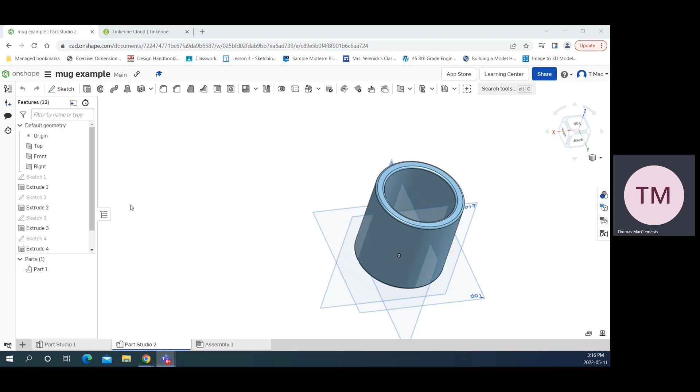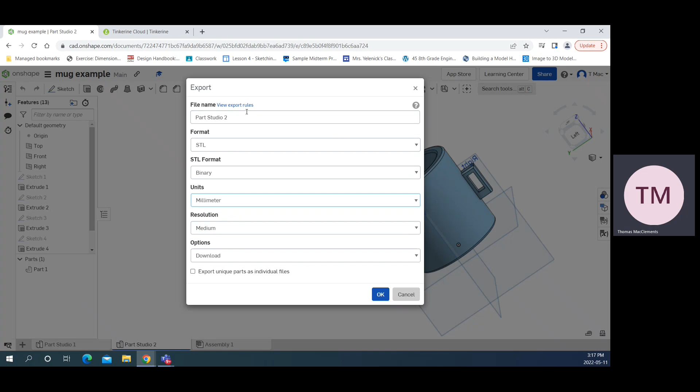I'm already in Onshape here with my fancy mug. You're going to right-click on the part studio that has the part you want, click on Export, choose STL file, change it to millimeters, and give it a file name, mug.

Okay, so I've downloaded it. Now I'm going to go to Tinkerine Cloud, sign in, and import the mug file. It is successfully uploaded, so it's right here, double click, and I have it open.

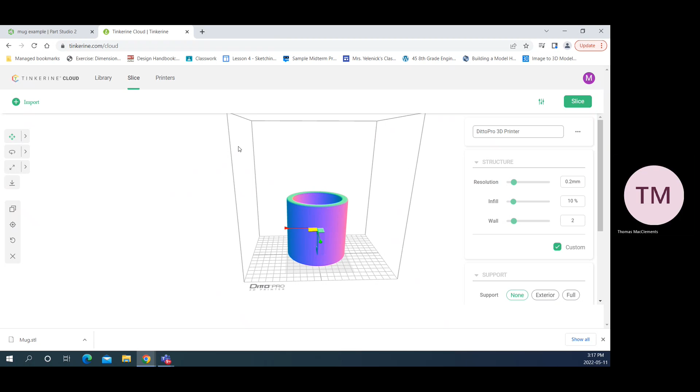To move around, you right click to move around and left click to rotate your view. On the left-hand side, we have translate, or moving the object, so I can move it left or right.

I can rotate it. For example, if I wanted to rotate it 90 degrees, I can rotate it 90 degrees. If I want to undo it, just Control Z.

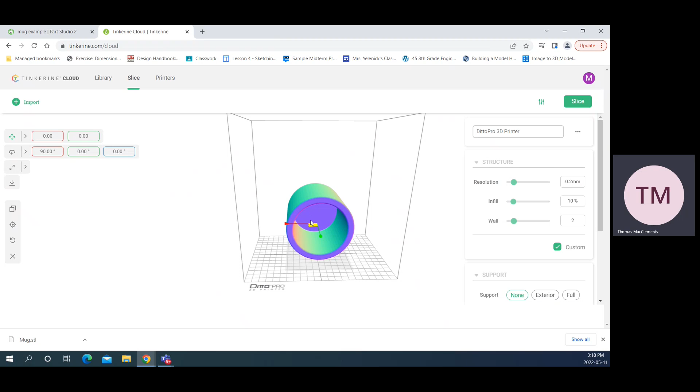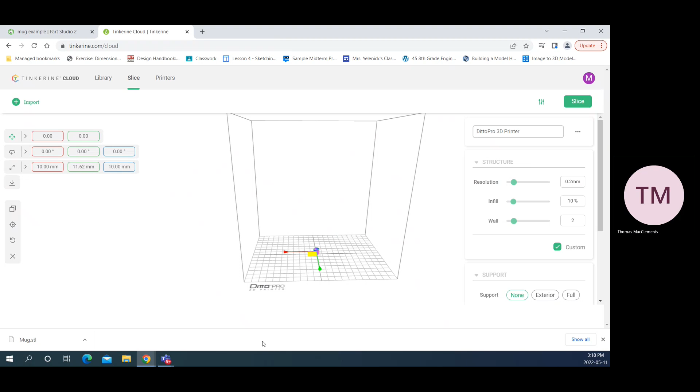Then I have scaling here. It's going to automatically keep the ratio, which is almost always what you want to do. In this case, I'm going to change it to be 1 centimeter, and it changed the scale. I'm scrolling in using the scroll button on the mouse.

This button right here, make sure that it's on the platform. Once we have it on the platform, we could add other models if we wanted to, if I wanted to have more of the same. We can undo that.

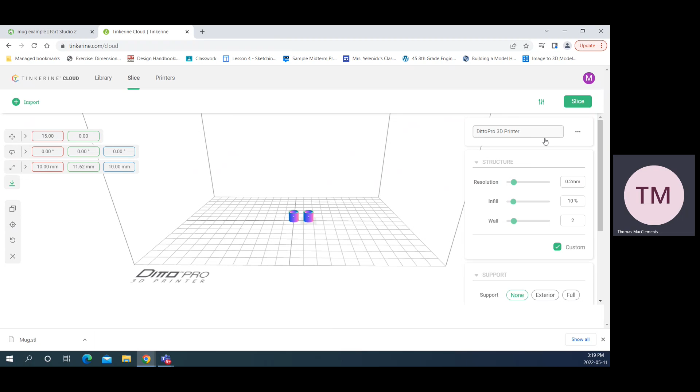Now I'll show you how to set up the settings for the slicing. Our printer is this one here, the DittoPro 3D printer. Normally it looks like this, sorry. You're going to click on medium, infill is sparse, click on custom.

The resolution, this is medium, so 0.2 millimeters per layer. The infill you're actually going to change to 10%. It's going to use a lot less plastic, and it'll still be plenty strong. The wall is the outside layers, so anything facing the outside world will be 2 layers thick.

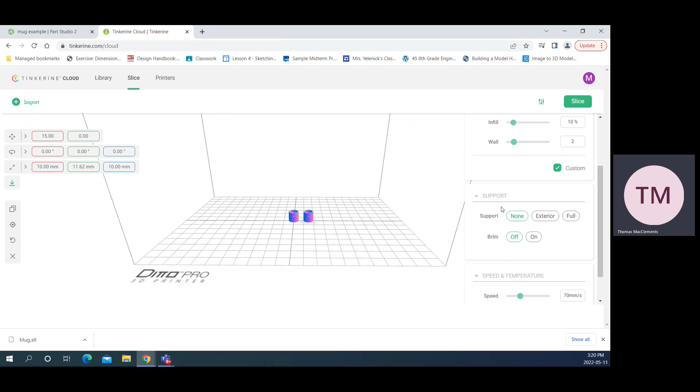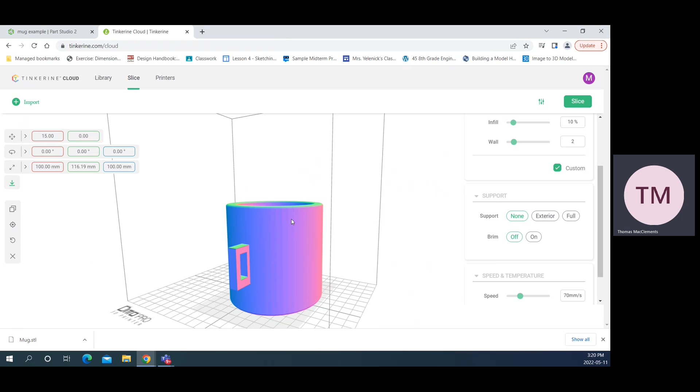Sometimes you might need support. I'm going to change the scale back to 100 so we can see a little bit more. My other model that was there is still there, it's just been eaten by this one, so I can see it right there. If I want to put a brim on, the brim just helps with adhesion to the printing platform. So let's press slice and have a look what happens.

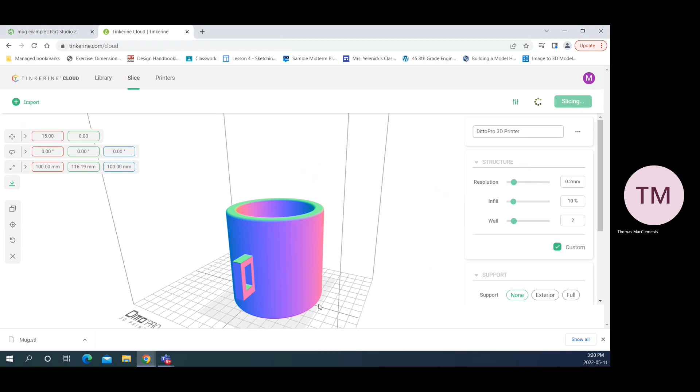Good. So right at the bottom here, you can see how there's a couple layers right here that are outside of the full mug, and that's the brim.

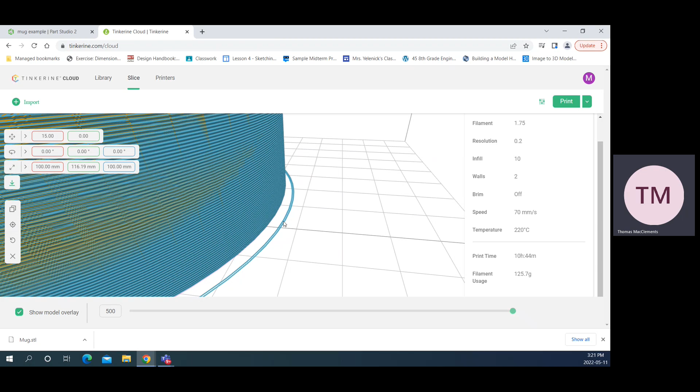So if I took the brim off and did the same thing, see, there's no layers in between right here. This outside layer right here is just to have it laid out so that you don't hit other models.

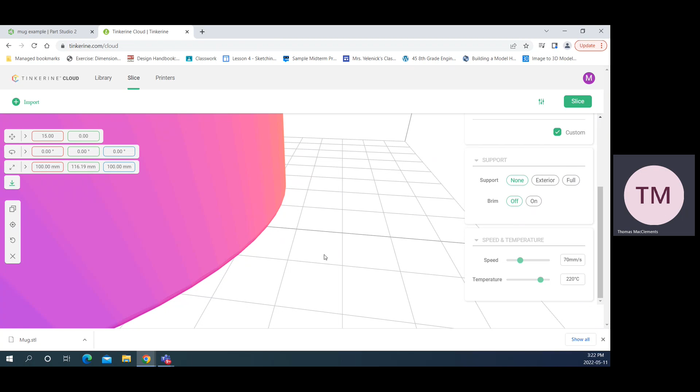Let's go edit again. You're going to leave the speed at 70 millimeters a second, and leave the temperature at 220 degrees Celsius. This is the melting temperature for PLA plastic, the plastic you guys are using in class. If it was ABS plastic, you'd have to change the settings, and if it was a flexible filament, you'd have to follow whatever instructions were with that filament.

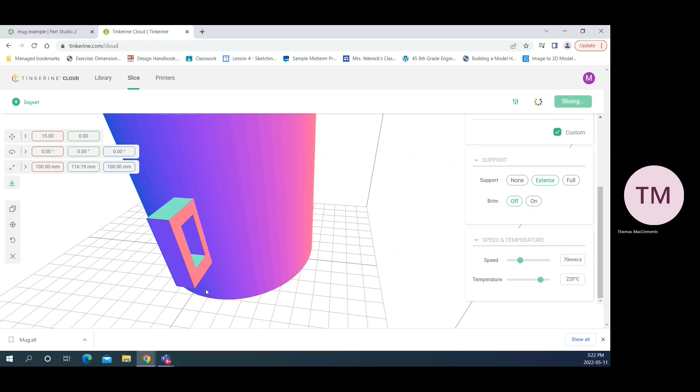Now with support, we can have exterior support. Let me click slice, and it will automatically create some supports for us. Good, so exterior shows it right here, it's supporting this underside. Otherwise, if it tried to print in space, it would fail.

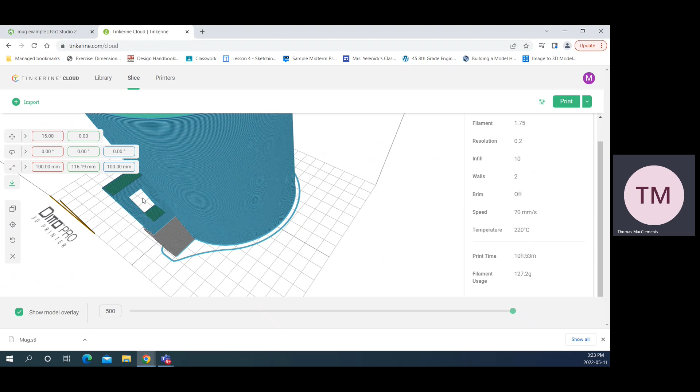But notice how within the handle, there is no supports. So there's a good chance that, once it gets lined up, this top part there would fail because there's no support and it would be trying to print in thin air. So in which case this print would fail.

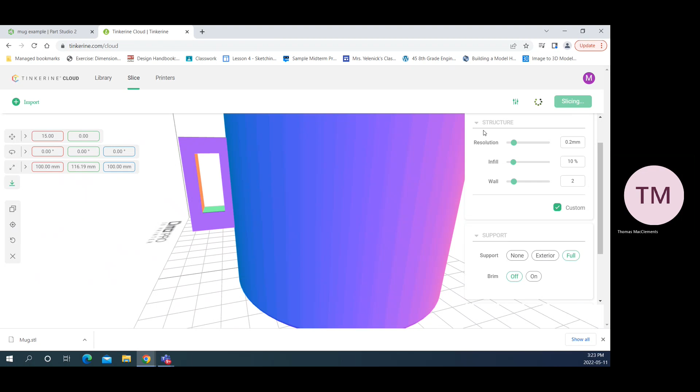So I'm going to scroll back up, edit, and click on full, then slice it again. Good, so now this time we can see still the supports underneath, but also interior supports within the model to make sure the handle prints properly.

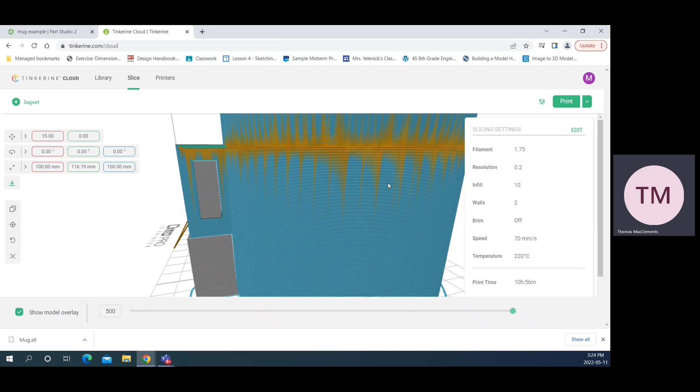Once I slice, I can see how much time it's going to take and how much filament it's going to use. So it's going to use just under 130 grams of filament, and it's going to take 11 hours to print. All of them definitely take a long time to print. Obviously, the bigger it is, the more it's going to print.

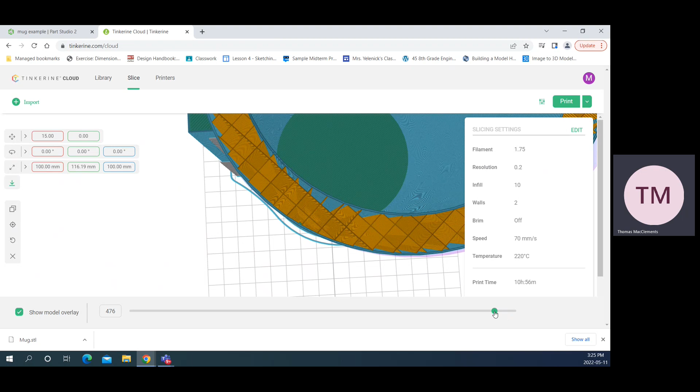Now, when we set the infill to 10%, what does that look like? We can step back through all the layers and see the infill right here. We have the walls on the inside and outside, and then the interior is infilled with honeycomb shapes. As I go down, it goes all the way down, and you can see it's also in the handle there.

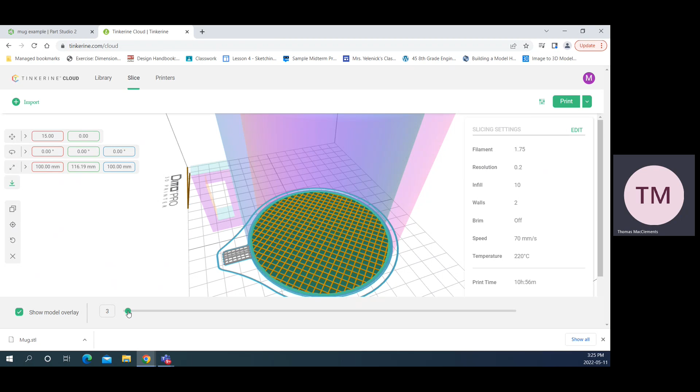And I can step all the way down to the very first thing the printer is going to print. You can see the bottom layer is printing fully solid, and then by the third layer, it's starting that infill. Once I've sliced it and I'm happy with how it's going to look, I'm going to keep my eye out for anywhere I'm trying to print in thin air, because that will definitely fail.

Go to download, and after you've sliced it and downloaded it, it's going to be a G code. So you're going to go to your downloads, and you'll find your G code, and you can move that onto the SD card.